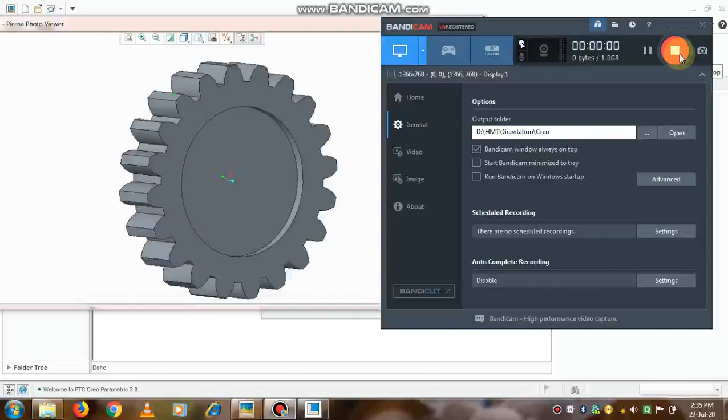In this video, we will see how to create a spur gear in Creo. So see, this is the model, and we are going to create it by using the extrude command, and some new commands also you will learn in this video.

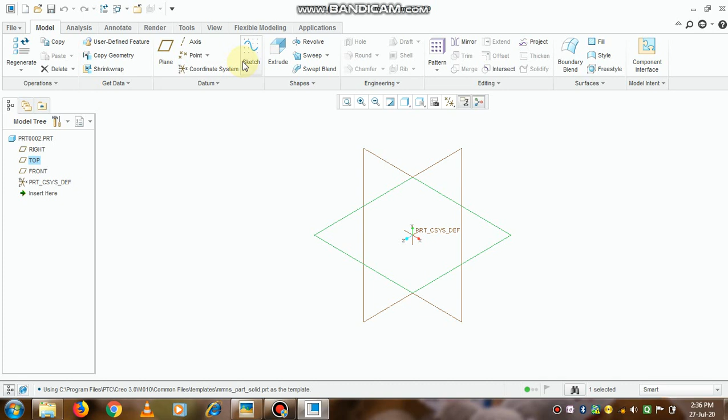So select the mmns part solid model. This is the window that will appear in front of you whenever you open Creo. Now first of all I will select a reference plane. So I have selected the top plane, and you can directly go to the option extrude, or sketch and then go to the extrude option.

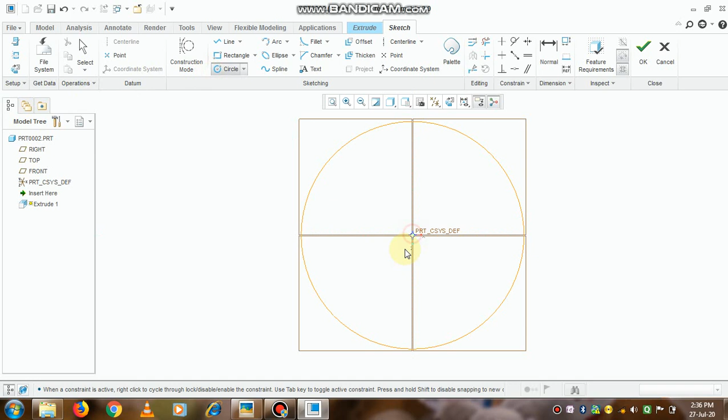So first I am creating a circle. These are the rough dimensions I am taking. So whatever drawing we have, of that dimension we can create the gear. So this I am taking as 150 and click on OK button.

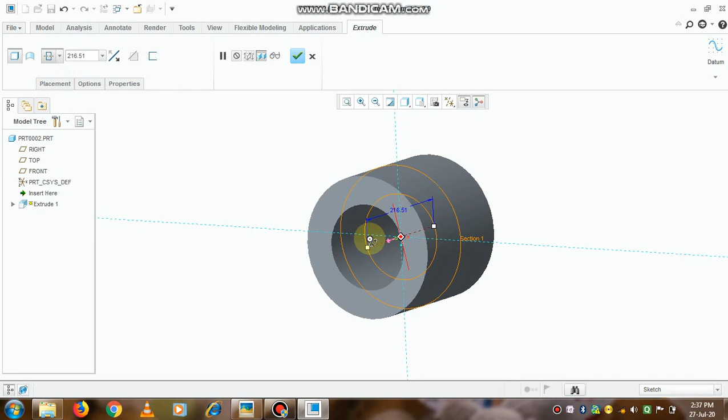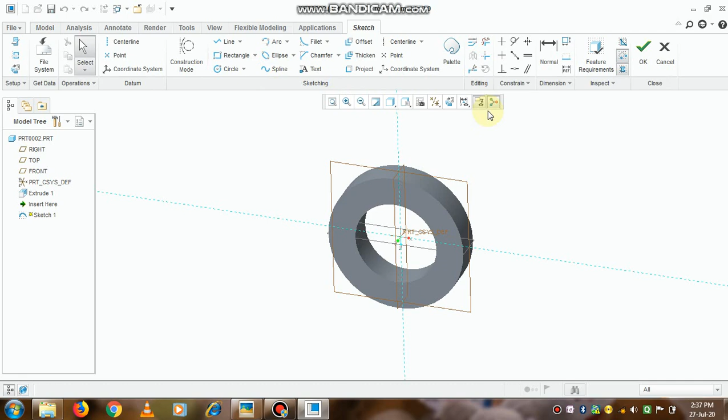Now I am using the extrude command, so I am extruding it to a distance of 50. Now see here what I have selected, extrude on both sides, so that there will be symmetric sections along the plane. Now select the plane on which we have done the sketching and go to the option sketch. Now this is the sketch view button I have selected.

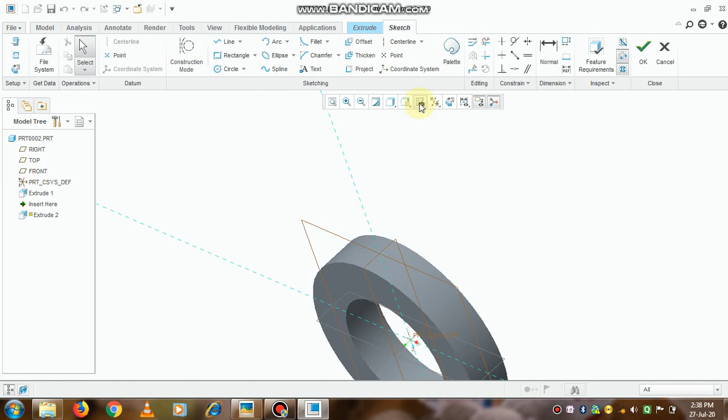Now we will try to create a tooth. When we are modeling a gear, the most difficult task is to create its tooth. So in this video you will learn some simple techniques. Again there are different ways: you can go to sketch, first draw the sketch and then extrude it, or otherwise you can start it from extrude also.

So now I am in this option. First of all I will create a center line so that when we are using the mirror command it will be helpful to us. So keep in mind that whenever you want to use the mirror option, always create a center line. Now see, it is showing the symmetric length, same length on both the sides.

Now if you go to the line command, it will take it as a simple line, and the point is not taken on the circumference. So that's why I have gone to this reference option and selected the circumference as a reference. Now take it as 12 and go to the option that is arc.

So curvature is there. Now for the mechanical engineer, it is not only important that you should be able to model it. You should be able to understand what exactly the gear is, and its nomenclature as well. Only modeling will not help you to grab your dream job or build your career. Both are required, that is the basic fundamental engineering knowledge as well as the software skill set.

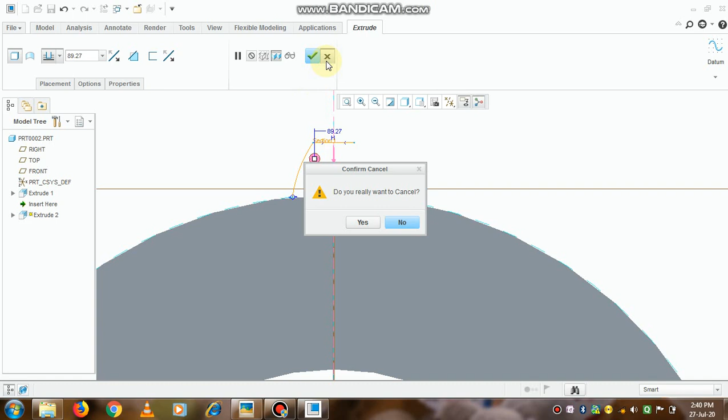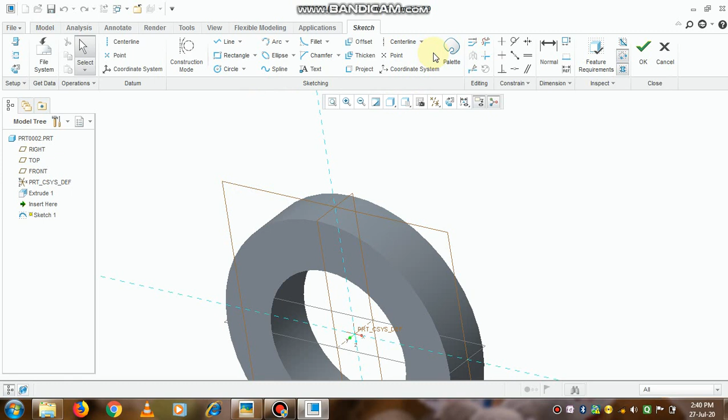I'm taking it as 140. So whatever your addendum circle is, depending on that you can take the radius from the center. Now see what is happening, the sketch is not closed, so when we go to the option extrude, it will extrude it as a surface. If you want to create a solid section, it should not be an open sketch, it should be a complete sketch. If you create an open sketch, then it will take its minimum thickness and the surface will be extruded.

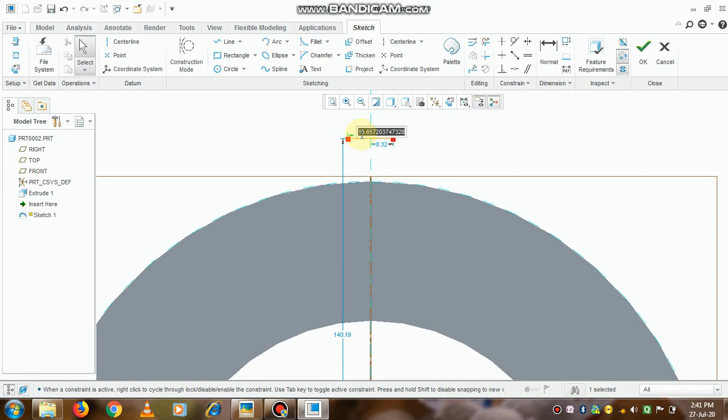Again I am at the sketch view option. So I have created a horizontal line; it is showing 16, so we'll take it as 12, which is our desired length. That is the actual tooth thickness. When modeling a gear, you should understand what is the module of a gear, what is the addendum circle, dedendum circle, and pitch circle diameter. These all come under engineering fundamentals for gears.

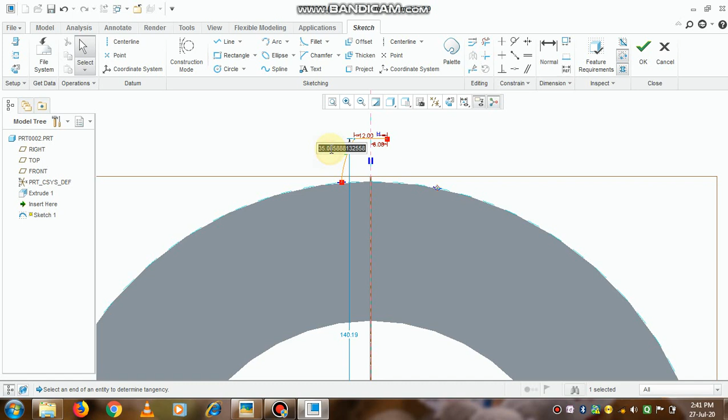Now select the arc here. We have created a reference, that is the circumference of the circle, and this is the arc length. Take this as a round figure, that is 35. Now we'll check whether our mirror command is working, and before that we need to close the sketch as well. So this will not work.

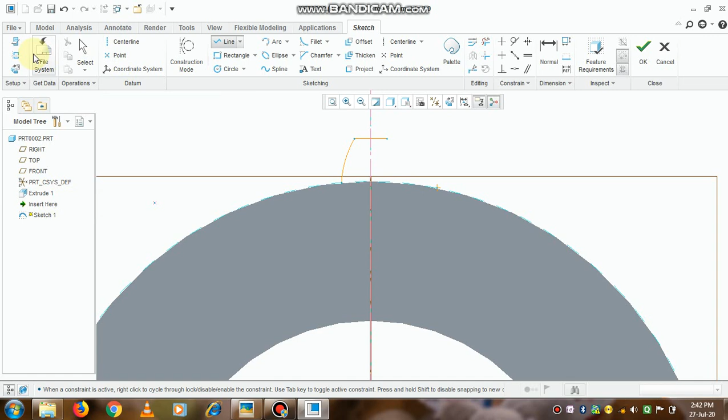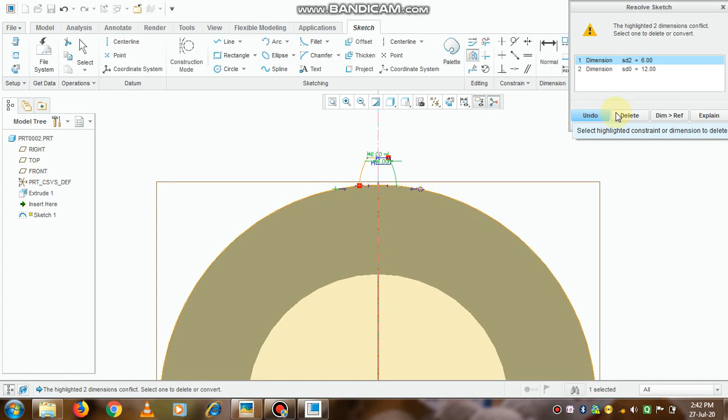So now the circle is drawn, which coincides with our outermost circle, and let's see whether the mirror command is working now. Yes, now it is working. There are different ways in which it can be modeled. You can also use the project command, or here in this case we have simply created one more circle on its circumference, so that's also fine.

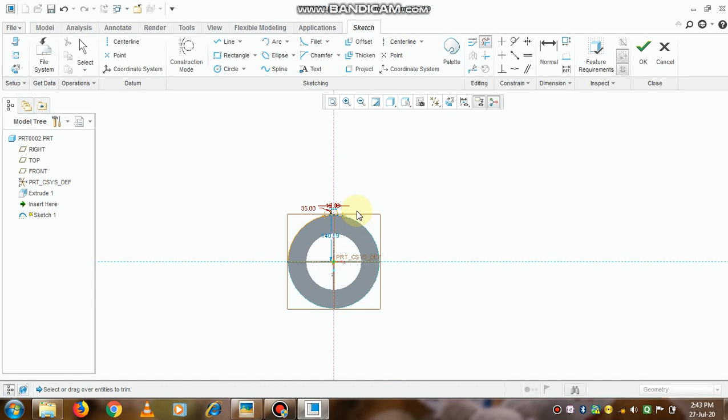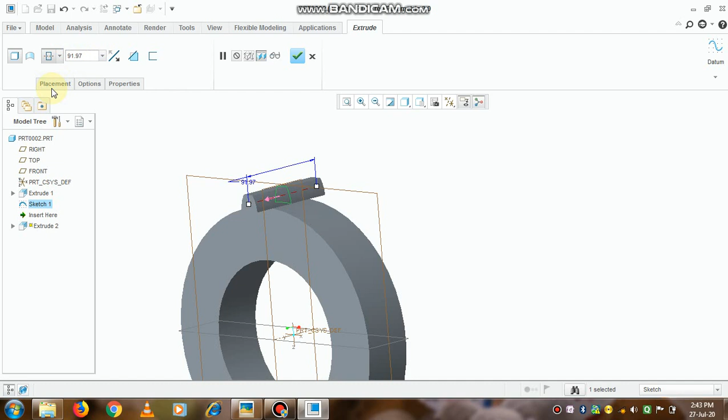Now let's check whether it is going in the correct way. At this stage, we are deleting the extra lines. If any problem occurs there, we will have to use the project command. Let's check now. Yes, now it is the correct extruded portion, it is showing it as a tooth. We have extruded it on both sides, total length 50. So see, now the tooth is created.

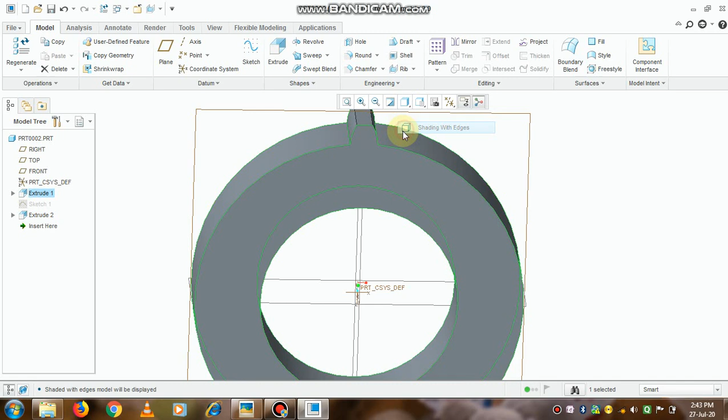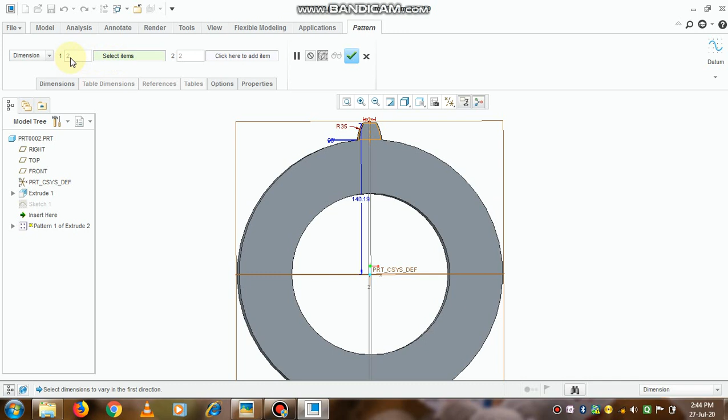Now what is the next step? We have to create it around the whole circumference, so we can use the pattern command. Go to the option extrude and pattern. In this pattern we need to select, on the left side, the axis, and then the number of patterns, the number of teeth you need. So I have selected the axis about which we create it, then number and degree.

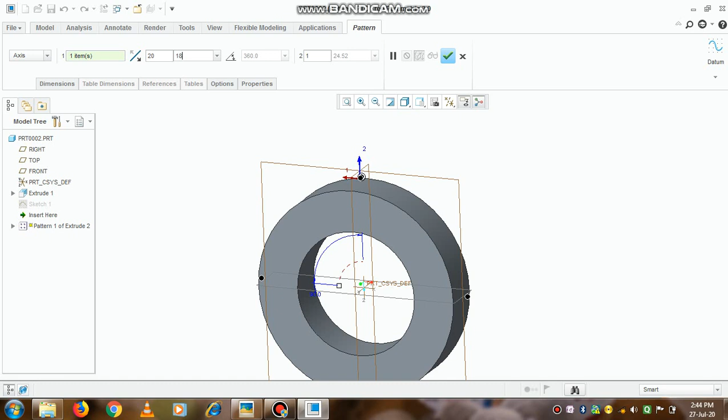I am selecting 20 as the number of teeth I want, and the angle, 360 by 20, so 18 degrees, and click on OK. See, now the teeth are created. This is our gear teeth. We could also create a central portion and give a keyway so that it can be mounted on a shaft, but the objective of this video is that you understand how to create the teeth.

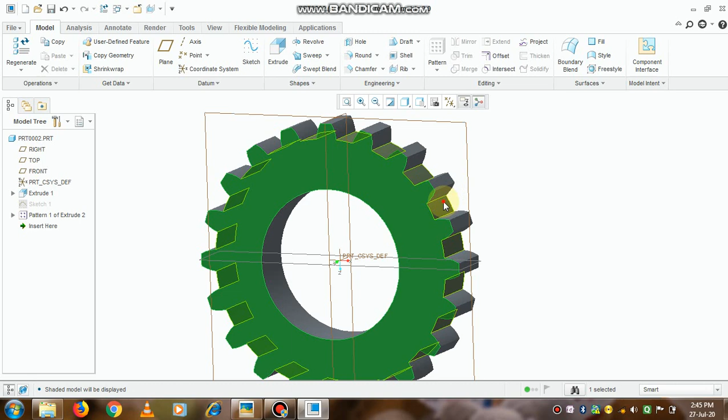So see, here we have created gear teeth within 10 minutes.